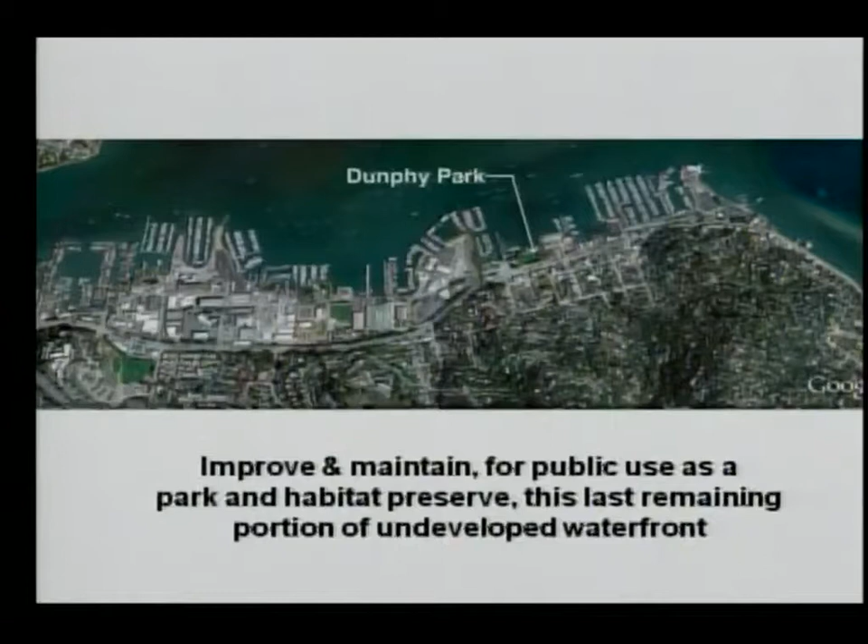For those who have seen previous presentations, a lot of this will be a repeat. You can see the park is right in the middle of town on the waterfront, and this is to improve and maintain it for public use as a park and a habitat preserve—this last remaining portion of undeveloped waterfront. We do have a wonderful waterfront to the south of the central part of town along Bridgeway, but that's a different feeling—it's rock riprap with a fantastic view of the city and the bay. Dunphy Park represents a completely different situation, in the heart of the residential area, with a relatively undeveloped waterfront that offers a lot of opportunities.

This gives you an idea of the ownership of property around the park. Galilee to the north, Houland—probably no longer the name, that's the former Malia property, it's been sold recently and I'm not sure exactly the official name—and then there's Bridgeway Marine, which is an important owner to the south, and other owners in the neighborhood.

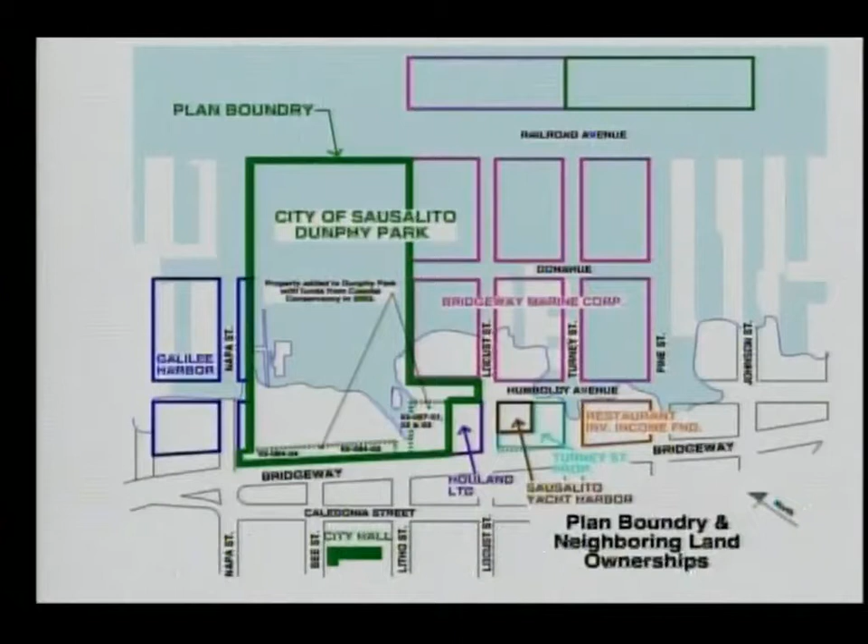The Schematic Master Plan is a guideline to assure that future incremental improvement plans are compatible with the city's long-range view for park development.

As was explained earlier, this park was built by volunteers in the 80s, and not much was done since then. But it's clear that something needs to be done, and we realized this, so we wanted to make sure that anything done would be part of a vision for the future and compatible with it. We did not know at the beginning that we would have the funds we have now, and now we actually have an even better opportunity than we thought we had.

Desired improvements, activities, and priorities will be defined along with preferred locations, technical requirements, and governmental limitations. The program for the Dunphy Park Schematic Master Plan is based on public input from an outreach program that included a city website, survey, a questionnaire, and a professionally facilitated public forum. We made a presentation of a summary of the public comments from these three sources to the City Council at a public hearing.

It was actually quite difficult to do this because the sources were three very different ones, but they were based on about 14 different topics, and so we were able to compile a consensus, and that formed the basis for how we went about developing the plan.

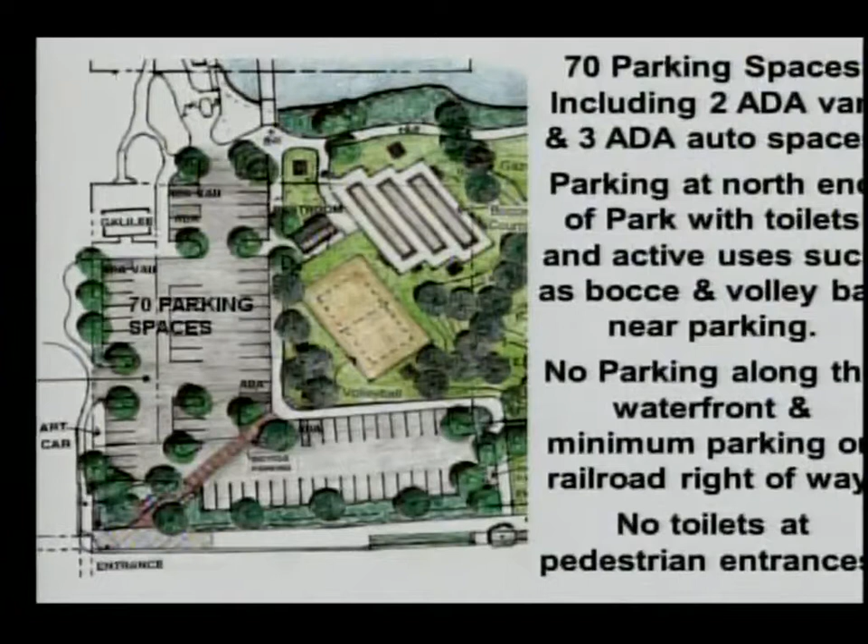So we moved from the parking to the active facilities. Now, one of the things that we did between the last city council hearing and this one is we contacted 3 of the major stakeholders in the immediate area: Galilee, the Bocce Association, and the Cruising Club.

The Bocce organization met and determined that they really had to have 3 courts, not 2. They also expressed a strong desire to be as near the water as possible, which is what they've been accustomed to in their current location. They also wanted to have as many picnic tables and benches as possible.

So we accommodated that. We had to sacrifice, to some extent, the berming aspects of the grass bowl and the sort of amphitheater effect we were trying to create for the bocce court. But we found a reasonable compromise, and we feel this has been pretty successful.

We flipped the volleyball courts and the bocce so that the bocce would be closer to the water as they desired. Picnic tables we show here, but this is really something that will be in the details to come. There's enough room for plenty of picnic tables. We don't know their exact design, and their location will have to be determined. Things like that, of course, are for the future.

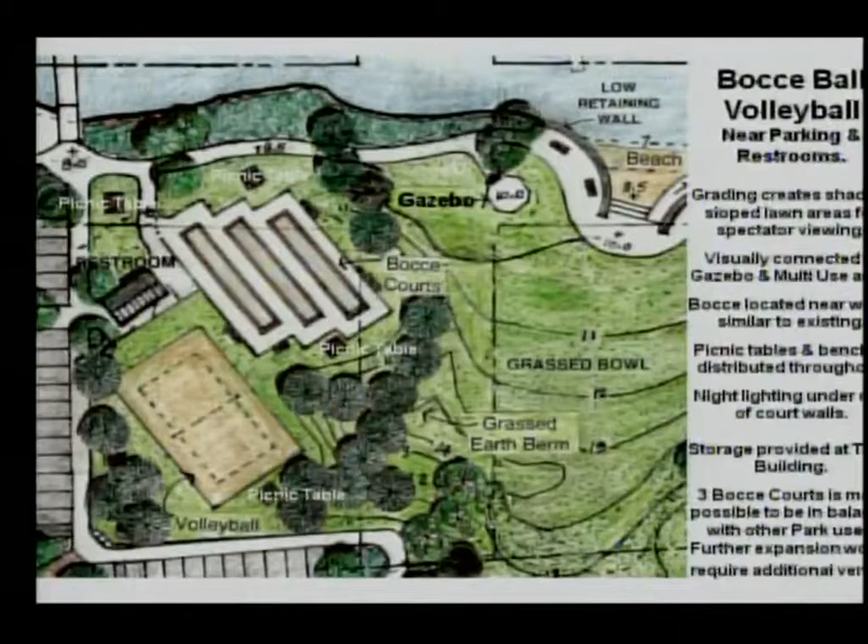Now, in our discussions with the Bocce League, we realized that they've grown very fast, and it's sort of been a surprise to everyone, and we don't know what the future holds. But we do feel that to keep the park in balance, the 3 bocce courts is really the maximum that the park can accept in balance with the other park uses. So if it should really become a bigger activity, then there may have to be additional venues found.

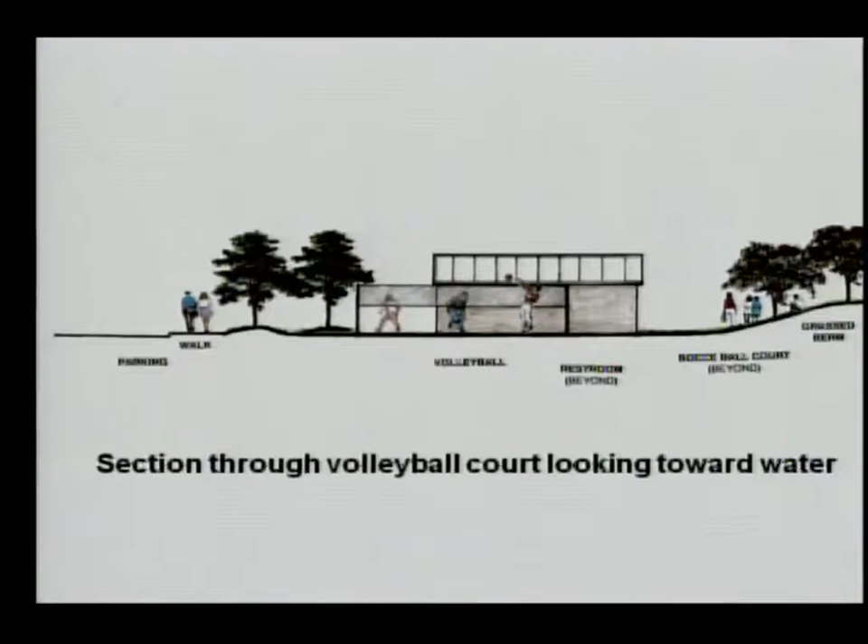The sections just give you an idea of how we have tried to create places where people can sit and observe the volleyball and the bocce. It gives the park interest, and it creates a sort of subspace, but at the same time, there's still a visual connection to the gazebo, which is kind of visually the heart of the park.

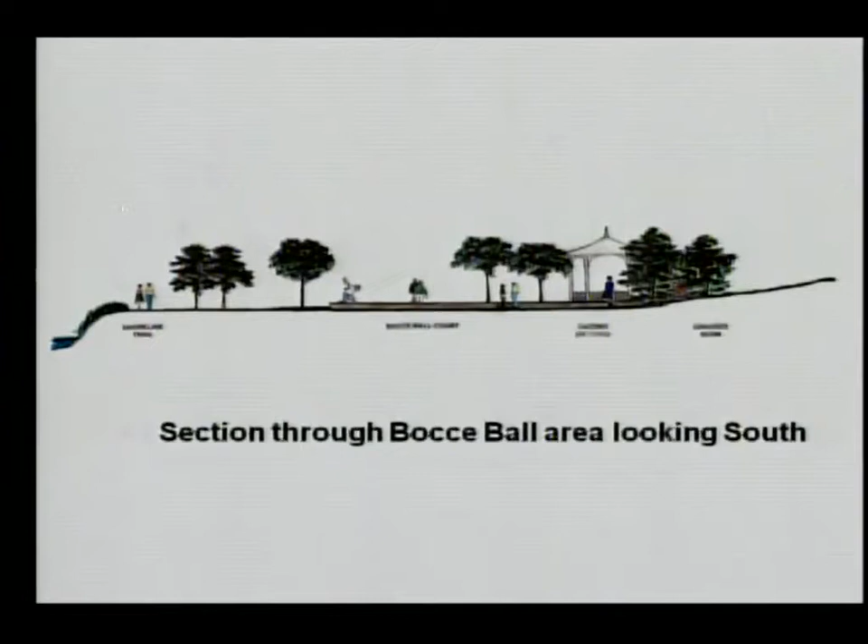And then the other thing that is very important to notice is the relationship to the water, to the shoreline trail, and then there'll also probably be park benches and picnic tables here. So the whole thing becomes a whole experience for everyone together. And then the other sections just again give you an idea of how the berms and the grading undulate and create interest and define different subspaces.

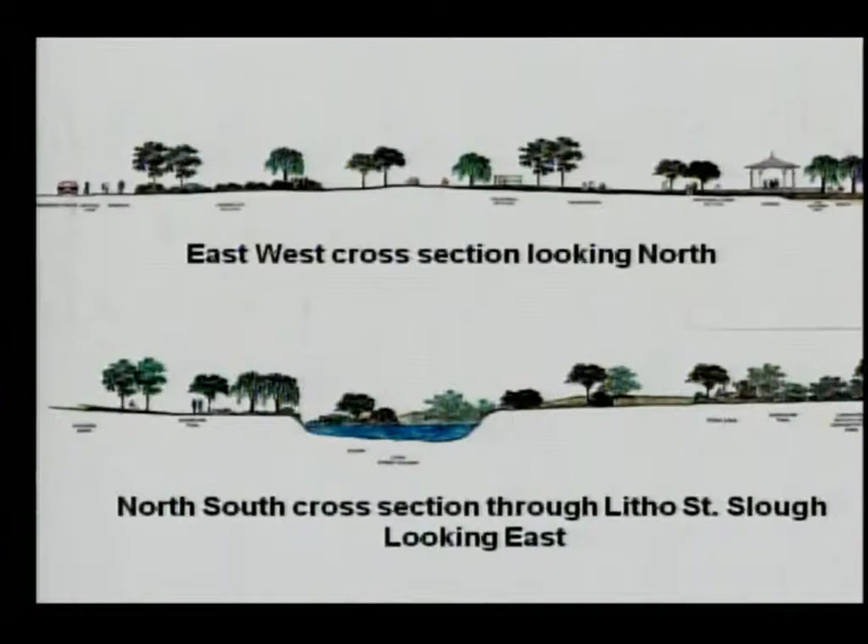So now we go to the multi-use area. And this is very significant here, that a core idea in this design, in keeping with the concept of giving the public better access to the bay from Bridgeway, we eliminate the railroad right-of-way in the southern end of the park, and we extend the contouring, which is a significant aspect of this design, to have the contours undulate and create berms and create the bowl, and extend the lawn area right to the sidewalk.

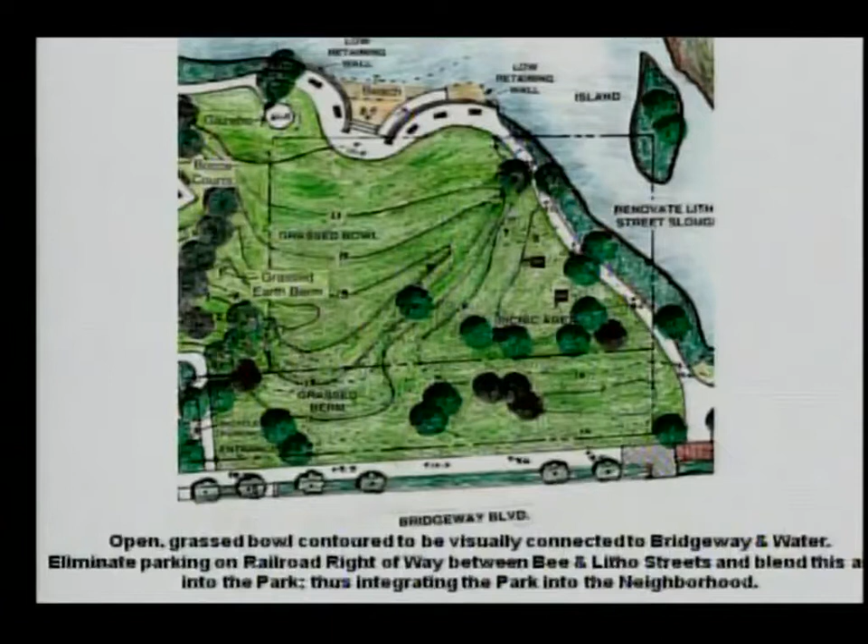I'll explain the sidewalk and the bicycle path later. There could be some hedges at Bridgeway that might give some low definition, but it's particularly important to have this connection to the sidewalk, since walking along there isn't the most pleasant experience. We want people walking along that sidewalk to feel connected to the park and to the bay.

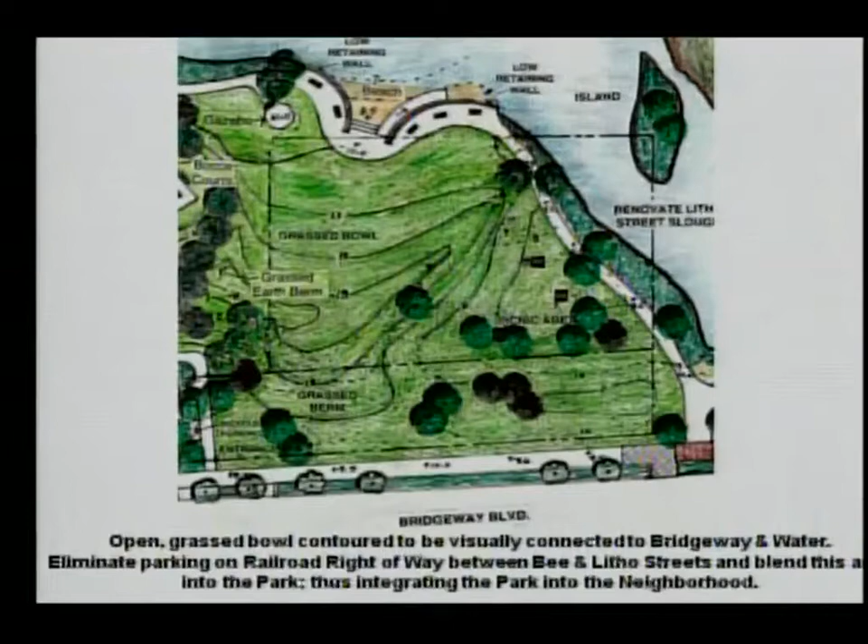The open grass bowl is contoured to be visually connected to Bridgeway and the water, eliminating parking on the railroad right-of-way between Bee and Litho Street, and blending this area into the park, integrating it into the neighborhood. The multi-use area is intended for community individual activities such as playing ball, picnics, frisbee, and birthdays or other family events. It will also accommodate large community events such as the 4th of July, Easter, musical activities, and the chili cook-off.

Now we go to the beach. We improve the beach with possibility for some water-based activities, reorient the cruising club to an open view of the water, and rehabilitate the shoreline. I'll talk about the cruising club in a future slide. The plan isn't dependent on the reorientation of the cruising club, but if it's possible there are some advantages to be derived from it.

Improve retaining walls and benches, add an ADA ramp to the beach, raise contours by 1 foot, and add steps and an ADA ramp to accommodate sea level changes. We've been advised that we should accommodate at least a foot of sea level change in the not-too-distant future, so we raised the contours. The gazebo is now at 9 feet above the reference point, and we've raised it to 10. Whether that will or won't be done, this is a schematic master plan.

It's advising things to be done. The details of which things will be done and when can be decided later, but we felt we had to be responsible and at least recognize that there could be sea level changes. By introducing steps down to the beach, which is necessary if we raise the level of the walk, it actually separates the harder surface of the shoreline path from the beach. The steps become a nice transition and something to sit on, and there's also a handicap ramp.

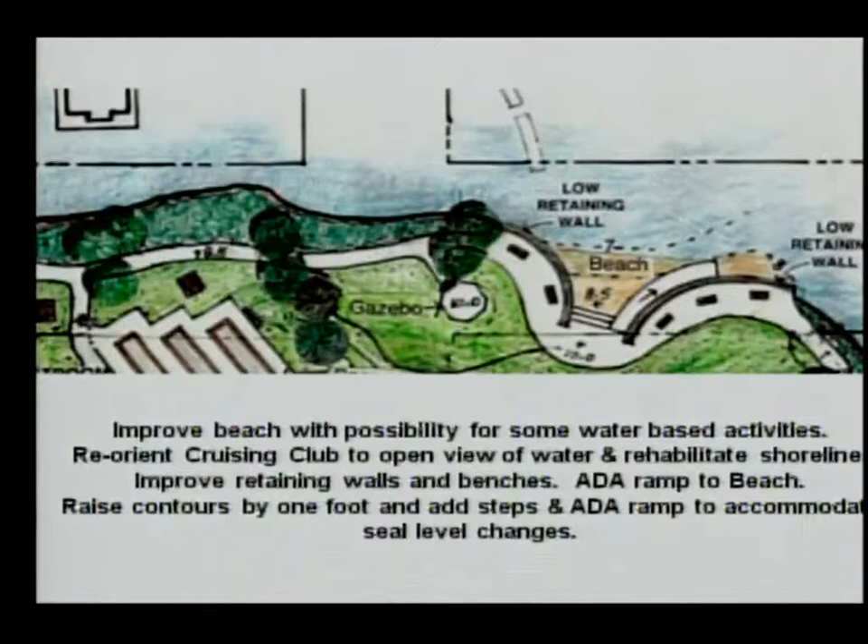The shoreline path comes in from Locust Street, goes through the park, comes out across Napa Street along the Galilee property. This path is a very important element because it ties all these various functions together.

This was the big challenge of this design—how do you take all these different functions and desires and link them together? The path really does that. So if people are playing bocce, but other family members want to go for a walk and enjoy the shoreline or go to the beach, it all links together. And if people enjoying the passive area are intrigued by what's going on at bocce, they can go over and join in.

You mentioned, Pam, a dog in the fight—this isn't meant to be a fight. This is meant to bring people together and make it blend.

The pedestrian path is graded to conform to ADA requirements, with benches and picnic areas along the way. The path is integrated with the overall BCDC public shoreline path through Sausalito and ties the various park activities together.

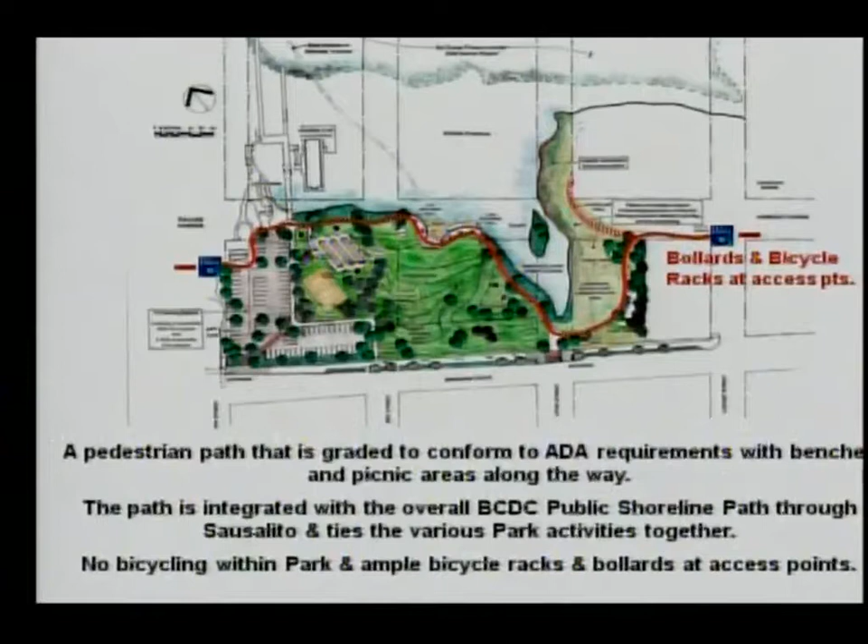Now, the bicycle and pedestrian path is a different issue, and there was a particular concern by one of the groups that we met with that they weren't sure we were maintaining that. I want to reassure them, as you can see, that we are. The orange path is a joint bicycle pedestrian path, and we're not proposing to change that, except that we're advising that at the crosswalks at Litho Street, Napa Street, and Bee Street there be a change in pavement to announce to bicyclists that this is an area they'll be sharing with pedestrian cross traffic, and they may have to look out or slow down a bit.

Now, the bicycle lane, which is on the street, is a whole other issue. That's where the faster bicyclists go, and that will not be changed. So the plan limits are outboard of the existing bicycle path, and it will stay the way it is.

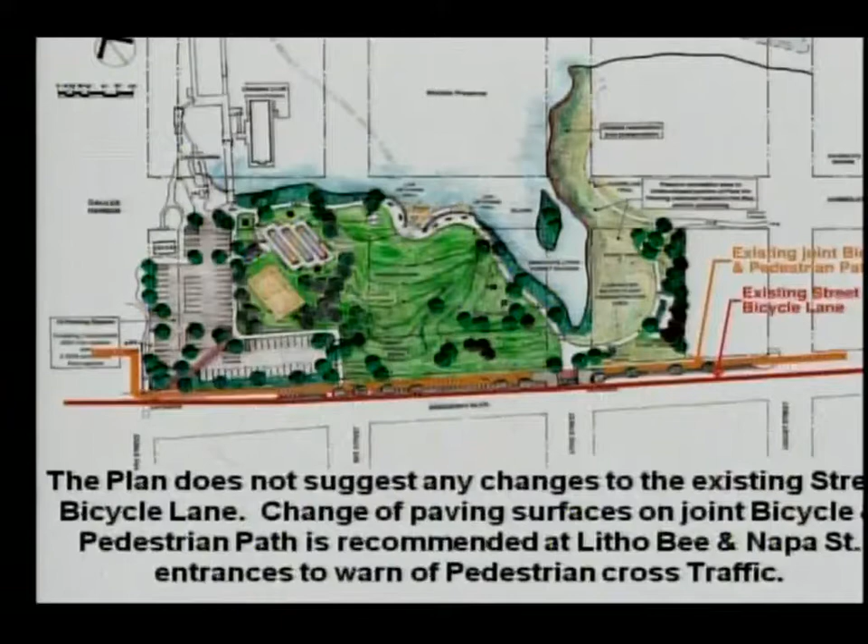Now, the Gate 6, the ferry terminal to Gate 6 road path is a whole other issue. The city council wanted us to be sure to have that be a part of this, but we have to make clear that the path proposal in the study is outside the boundaries of the Dunphy Park Schematic Master Plan, but it does not conflict with it. This master plan could be completely executed, and the proposed ferry terminal to Gate 6 road path could be built with no conflicts. There are just a couple of areas where further study would be needed to be compatible, but there's no problem there.

So it is recommended that the path study at Bridgeway and Napa Street be revised, and that changes to the pavement at Litho, Bee, and Napa Street park entrances be included to mitigate danger from pedestrian cross-traffic interface. Those are the two things that would have to be looked at. It's important to understand, however, that the study is for a very extensive and costly project involving total replacement of sidewalks, curbs, and street planting over a long distance. This may not be realized for some time. There'll have to be funding from somewhere, I don't know where. It'll be millions of dollars. Thus, the Dunphy Park Schematic Master Plan focuses on the existing joint path and street bicycle lane. Should the path project move forward, there will be no conflicts with the park plan.

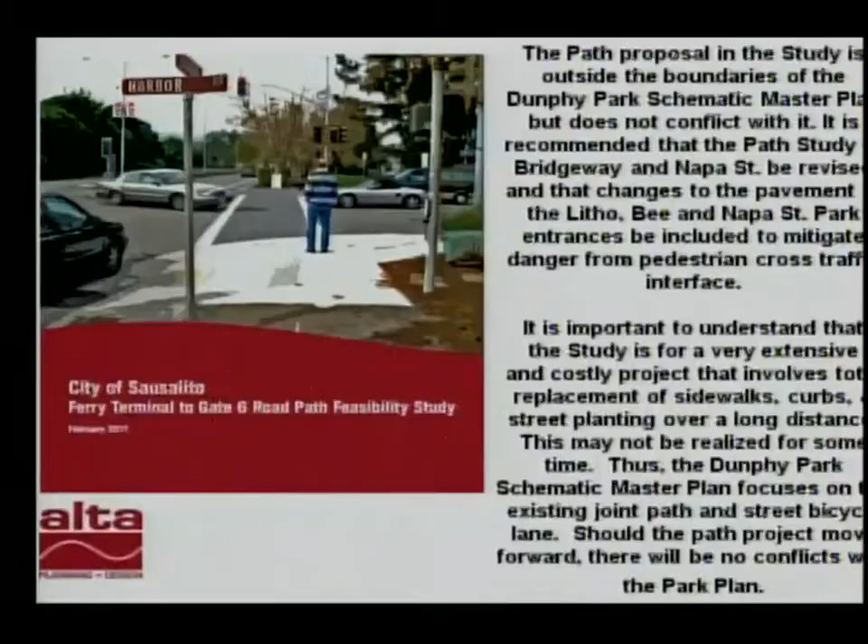So this shows you the ferry terminal to Gate 6 road path as it passes by, and it's completely outboard of the plan. At Napa Street, you can see that we would recommend certain alterations to the path at that point, but that's perfectly feasible. It's actually a very knotty area because there's a big power pole with guy wires and all kinds of stuff, so we've made an attempt to deal with that, and I think that's just a matter of getting into the details if this plan goes forward, but there's no conflict here.

And you can see a cross-section of what they're proposing, which would be very nice. There would be a sidewalk and a little division and two lanes of slower bicycle traffic, and then there would be the street trees that could remain as they are now or be added to. There could be some bushes along there if they wanted some buffer, and then there's the fast lane.

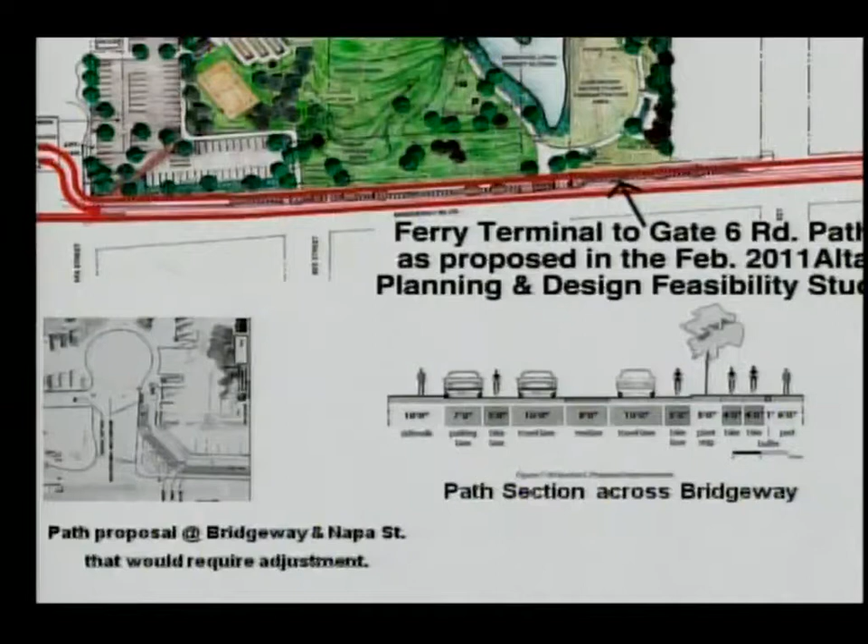So, in another slide, we'll talk about the water activities, but essentially what we're trying to do is keep all that to the south, because there already is going to be water traffic from Casa Marina and from the cruising club.

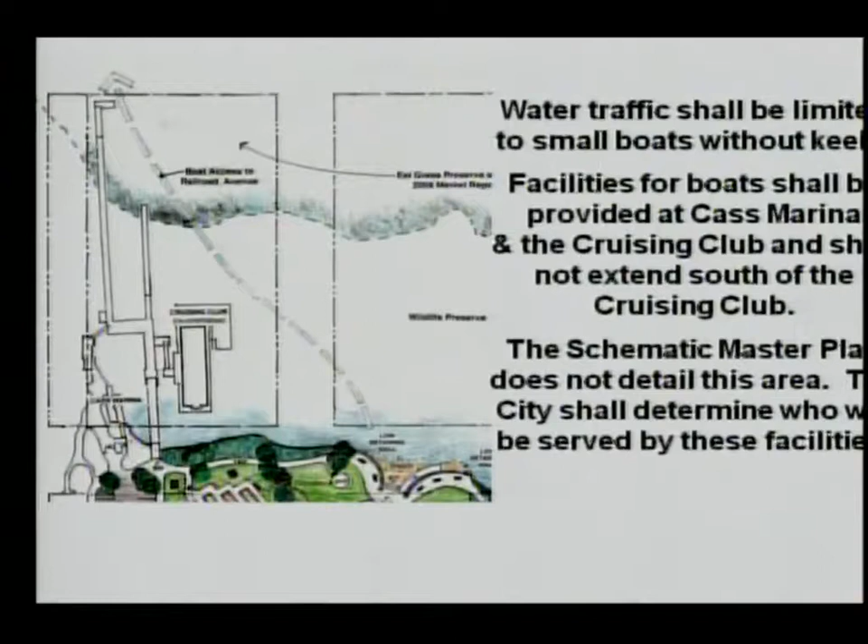The city will have to decide who is served. Is it all private? Is it going to be some public? We're not determining that. What we are determining is that that's where the activity should take place, so it leaves the rest of the area for the other functions. It seems like a good way of balancing all of these various needs.

So we met with the cruising club, and they are rightfully concerned that they don't want the plan to totally lock in a situation where the club has to be reoriented, because there are a number of things that might come up, technical ones in particular, and also there's money involved. So we want to make very clear that this plan is not dependent on the cruising club being reoriented, but it encourages it to be done if possible.

If it's not done, then all related boating activity would have to be removed from the south end and coordinated with Cass Marina. If any of you have noticed, there's an awful lot of stuff going on south of the cruising club barge, which really encroaches on the views and so on. We've talked to the cruising club people, and they understand that. If this were all reorganized and redone, it could be done in a way that would be best for everyone.

The cruising club lease would have to stipulate that onshore refuse be kept to a minimum and in a designated, visually shielded area. All other facilities specifically related to the cruising club, other than parking, would not be permitted onshore. All of these details would have to be worked out.

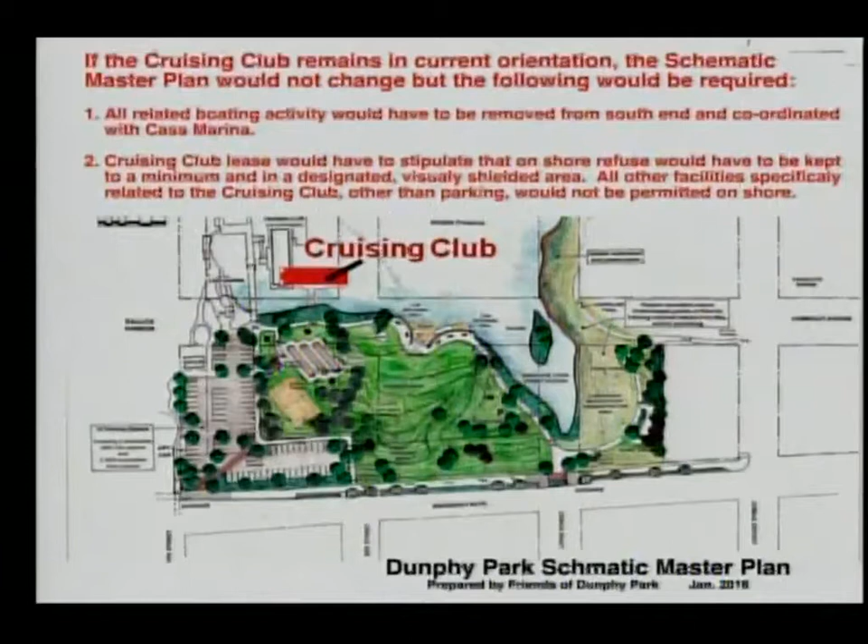Now the waterfront community, that's something raised in every one of these meetings. There are people who come up looking to the park to provide all sorts of different facilities that the waterfront people feel they need. Certainly finding a way to better integrate the waterfront and landside communities is an important concern.

Should the city of Sausalito determine that public showers, laundry machines, dinghy docks, moorings, etc. are necessary, there are locations available for those functions. But we feel that Dunphy Park is not the appropriate venue. It's a place where everyone is welcome to come, but it's not a place for these kinds of facilities.

Looking to the Dunphy Park Schematic Master Plan as a vehicle for solving all of the issues concerning the waterfront community will not solve them, and all it will do is delay really facing the larger subject, which should be addressed in a different forum.

Access to the park: again, bollards, bicycle racks, and signage indicating that no bicycles are allowed in the park shall be provided at all entrances. We have designed important entrances at Napa Street and at Litho Street, and also for big events and parades.

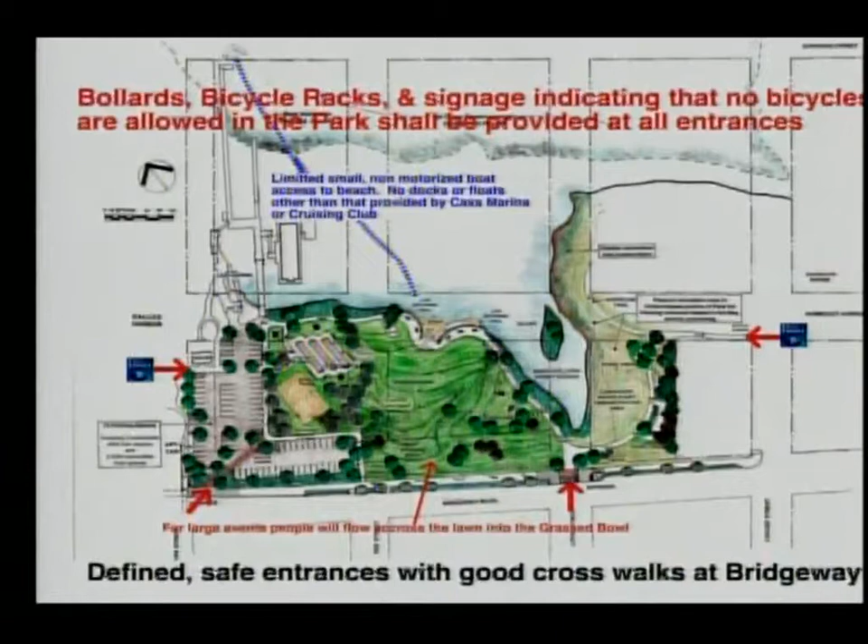Grading with rolling, contoured berms creates a central open grassed bowl while maintaining visual connection to the water from the Bridgeway sidewalk. Berms will also provide some wind protection. Runoff water management will be improved to minimize wet soil and eliminate standing water by regrading and installing an engineered subsurface drainage system as required.

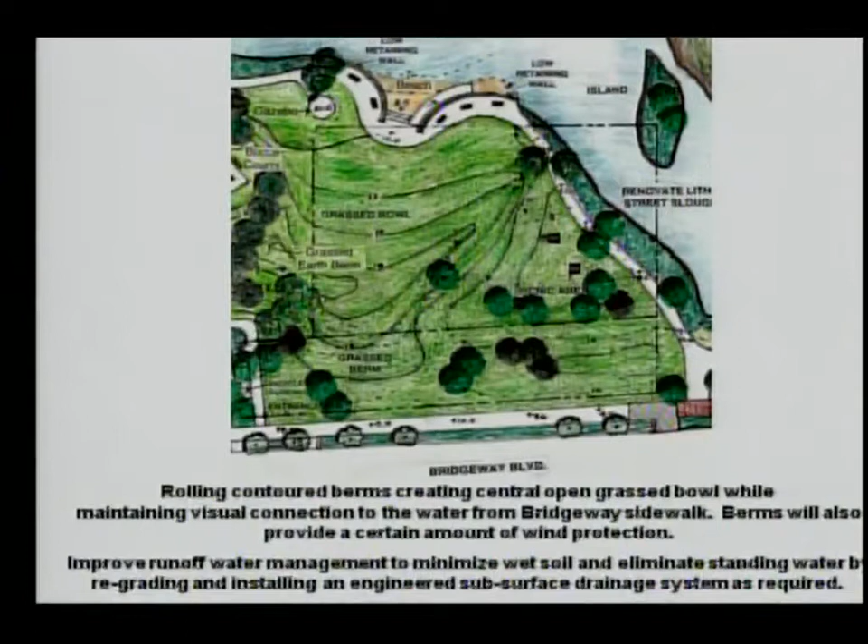Planting will include rolling grass with contoured berms, shade trees, and low-water-using plants. We'll improve the condition of planting by progressively replacing it with more appropriate species, and improve maintenance overall.

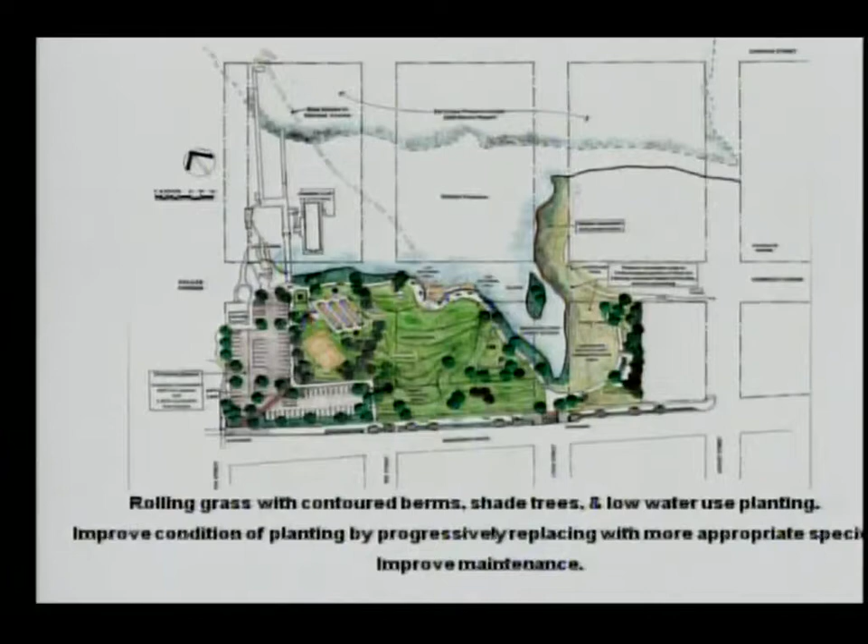I'm not going to go into too much detail because it's hard in a forum like this, but there's a concept here for how to choose the plants—predominantly low-water-requiring lawn and deciduous trees, with shrub masses used for screening of parking, and low shrubs and ground covers as appropriate. Those of you interested can look into this in more detail. This isn't the time to choose which kind of agapanthus—it's more of a concept here.

Paul Leffingwell has carefully looked into plant materials that he feels would survive well here. This is an area where there has to be a lot of careful work on soil amendments and bringing in new soil—it's a very bad area for plants right now. We consulted with city maintenance and horticulturists, and everyone agreed the existing trees are in very bad shape and eventually all of them have to be replaced. This also allows for better grading, because you can't really grade around an existing tree. So we have to work toward that goal and get material in there that will thrive and give us the kind of park we really want.

Again, those of you interested in plant material can look at this, and you'll see the various plants suggested to choose from.

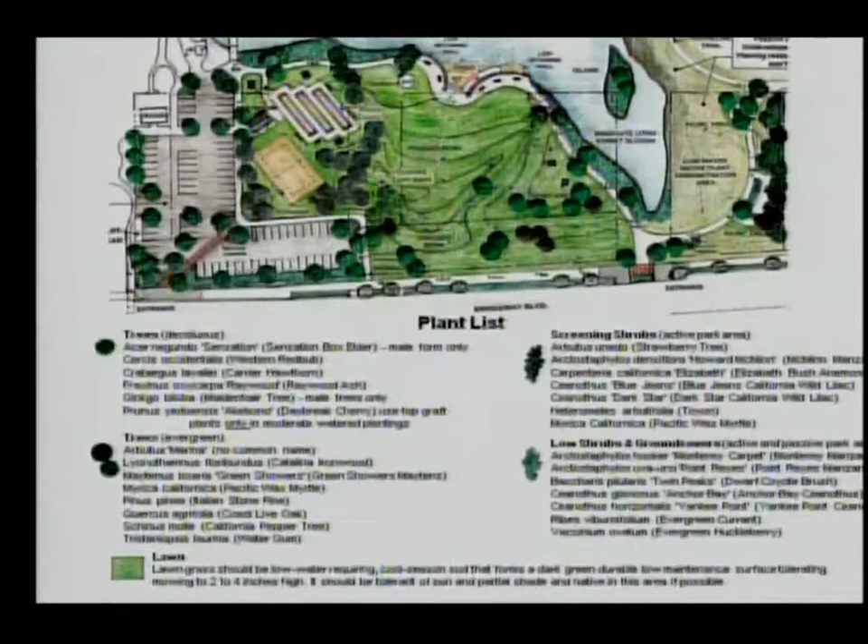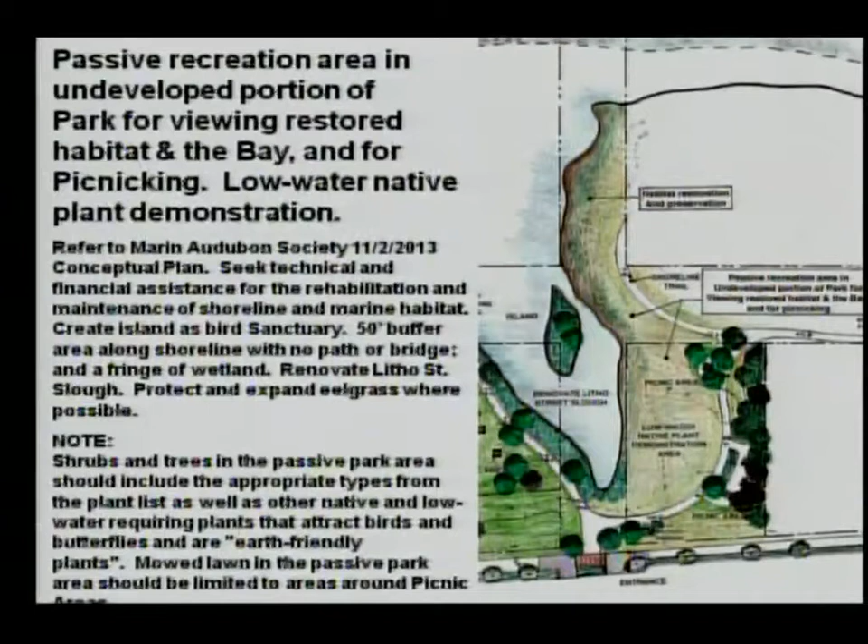For habitat restoration and preservation: a passive recreation area in the undeveloped portion of the park for viewing restored habitat and the bay and for picnicking, with a low-water native plant demonstration. I won't go any further than that at this point.